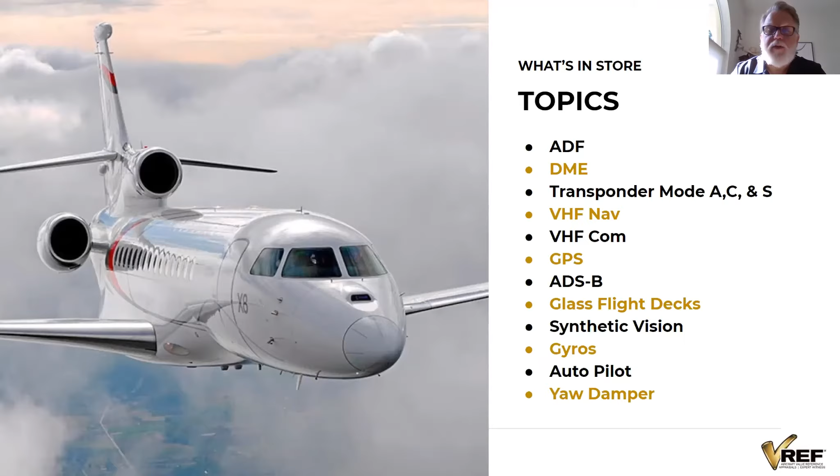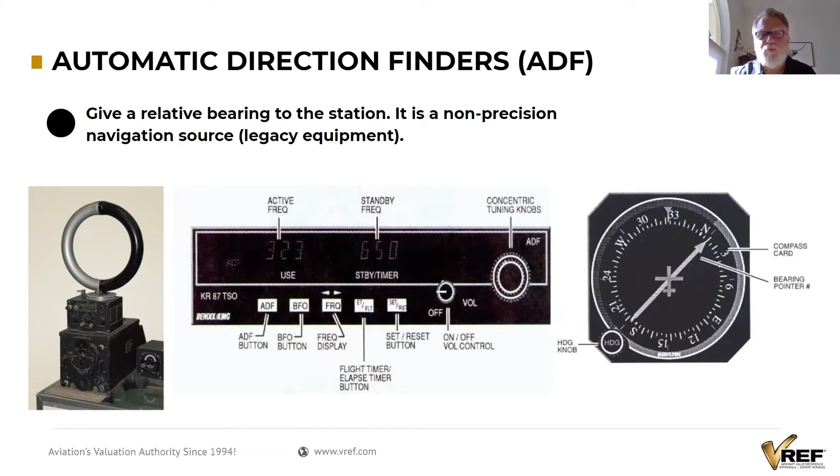Let's start with the old non-precision systems. ADF is one of the first forms of radio navigation. It's non-precision; basically a receiver uses antenna technology to determine where a transmitter is. Of course, some of the very first forms of radio navigation were four-course or A-N navigation, for some of you old guys like me.

DME, distance measuring equipment. These DME ground stations are co-located with either a VOR or a localizer so we can determine distance to a ground station or the runway. It calculates distance in nautical miles, and from changes in that distance it can determine ground speed or time to the station.

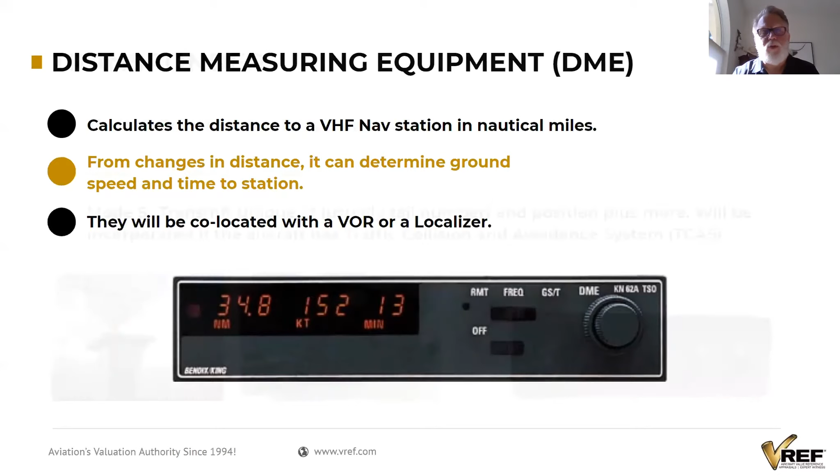Transponders, a big topic. This continues on with our pulse system, because DME is a pulse system form of navigation, and communication and transponders are as well. They use pulses to interrogate and to reply.

So we have Mode A, which is our identity, a squawk code that the flight crew dials into the front of the transponder. Then we have Mode C, which transmits pressure altitude, based off a standard day, 29.92 inches of mercury or 1013 millibars.

Then we have Mode S, selective interrogation, that's what the S stands for. It transmits a unique ID, usually the tail number, but it can be the flight ID, and it exchanges information like position, heading, and altitude. If you have TCAS, you're going to need a Mode S transponder, which is integral in the interrogation of other airplanes.

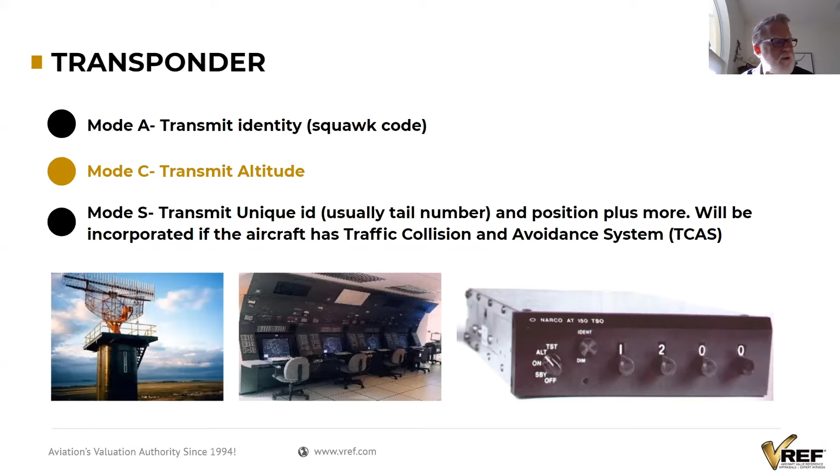VHF nav includes VOR, localizer, and glide slope. VOR, very high frequency omni range, is used to determine a bearing to or from a ground station. Then we have part of the ILS: localizer and glide slope.

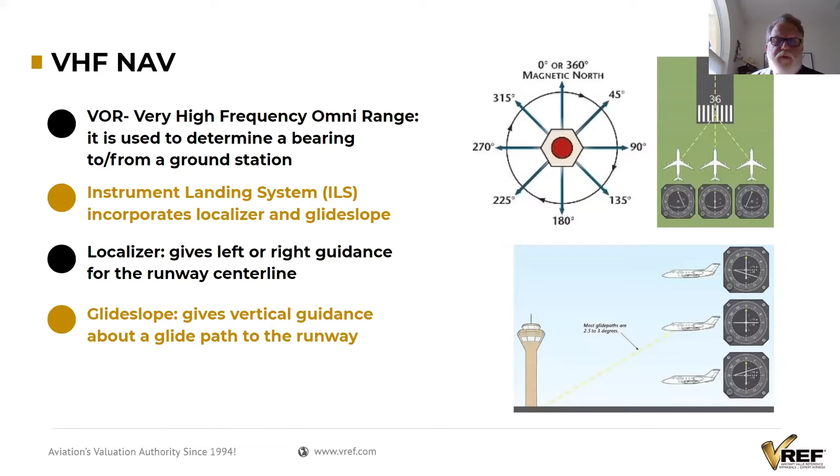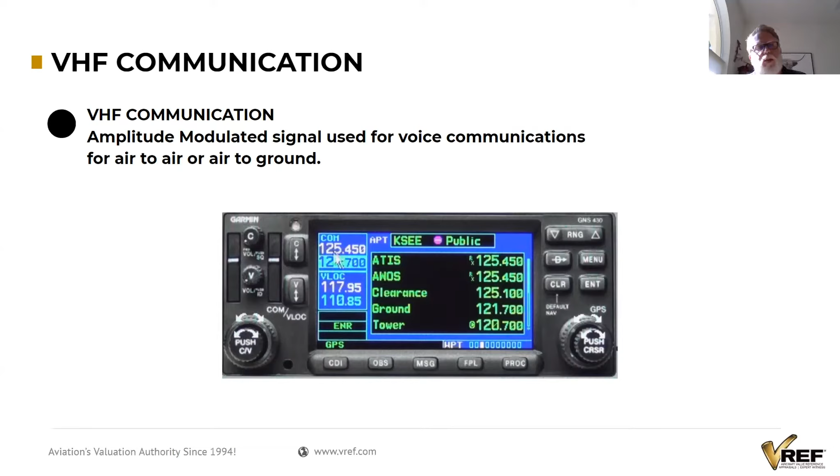Localizer gives us left or right guidance for the runway centerline, and the glide slope, a paired frequency of the localizer, gives us vertical guidance along a glide path, usually 2.5 to 3 degrees to the runway threshold. VHF comm is just what it is, voice communications. We use amplitude modulation in aviation - unlike frequency modulation you might be familiar with elsewhere - for air to air and air to ground.

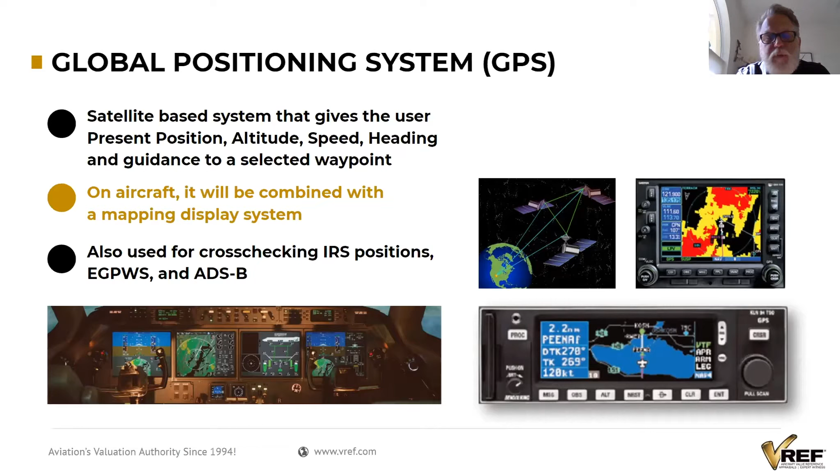Global positioning system, from a user standpoint, is the easiest form of navigation. It really tells us where we're at, giving us a present position that can be updated on a mapping system so we can see where we're at. We can also input a waypoint, and GPS will give us guidance to that waypoint, with altitude and direction.

So does GPS, Neil, replace your ADF and DME and Mode A, or is this redundancy? You always need redundancy, and that's one of the reasons ADF is still around, although it's non-precision - it's also why we still have VOR, why we still have localizer, why we still have glide slope.

So Loran went away a few years back, and that was a backup to some of these, but now GPS is, well, the VOR localizer can be a backup to GPS, or it can be the other way as well. 121 carriers can't and don't use GPS as a primary source of navigation, but in general aviation, you're seeing GPS used as a primary source of navigation, and VOR, localizer, glide slope, kind of secondary to that.

So when you see people buying brand new aircraft and they find that they have to order some of this old technology, it is still available, and that will never change. It's not about job security, it's actually about redundancy. You have two different systems, and it's about having two different systems.

So if GPS fails, and GPS is actually kind of a delicate system, there's been cases of outages with GPS and the accuracy of GPS. So you do want some form of backup, and you get into the bigger 121 aircraft, they'll actually be using inertial reference systems as their primary, which GPS can cross-check, but they'll use inertial reference systems for the primary.

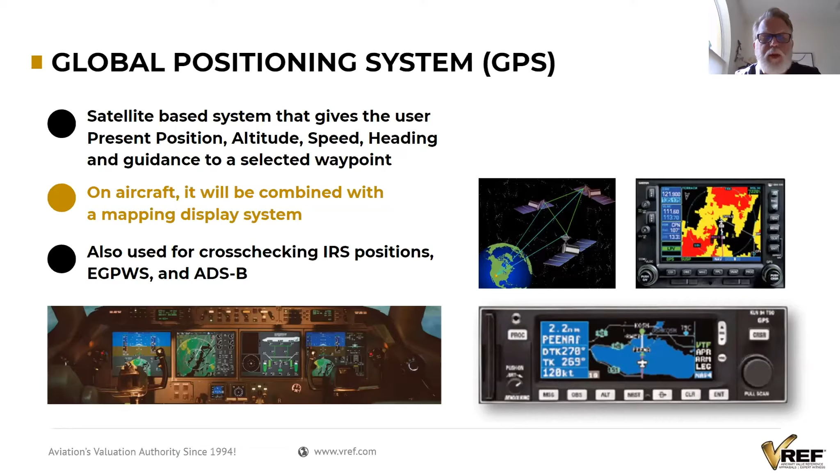And of course, with ADSB, automatic dependent surveillance broadcast, you have to have GPS. That's the position determining equipment that ADSB rebroadcasts out to all the other airplanes and the ground stations.

TCAS is a traffic collision avoidance system. TCAS uses Mode S transponders to interrogate aircraft, so it actually acts like a flying ground station. It interrogates other aircraft and looks for their relative altitude. Remember the pressure altitude I mentioned earlier. All the airplanes are going to output their pressure altitude. It doesn't really matter if that's their actual altitude. What's important is their relative altitude to your aircraft or other aircraft.

TCAS 1 will give traffic advisories, you know, there's traffic. Or if you have a TCAS 2 system, you can get resolution advisories, which gives us a vertical resolution or vertical profile to fly based off of feet per minute to avoid the closest point of approach.

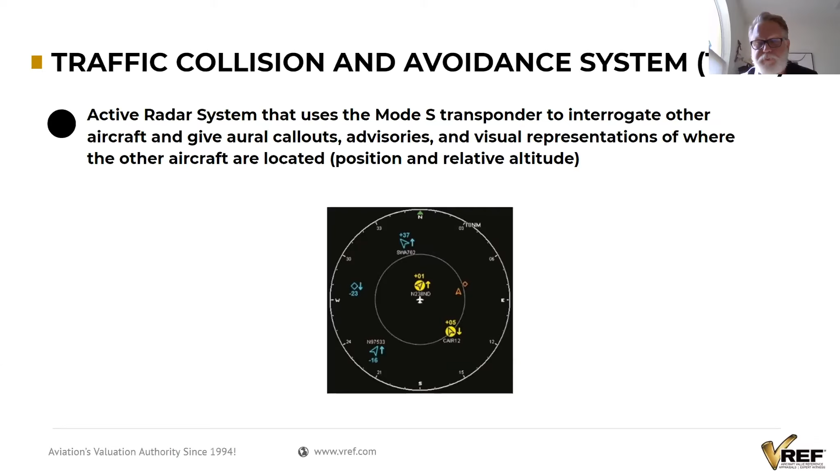The big one, ADSB, this was the big one this year, 2020 mandate. ADSB transmits position, velocity, altitude, and identity to other aircraft around it and to ground stations to be rebroadcast from the air traffic control system. So ADS-B out was the mandate, ADS-B in.

So ADS-B in, in this country, in the United States, you can get ADS-B in through 1090 extended squitter. This is the Mode S transponder. You can also get it from a universal access transceiver, a UAT.

That operates on 978 megahertz, so either one of those you can get in. However, if you have the UAT with the 978, you can get free weather. If you are using the transponder, both give you traffic, but you do not get free FISB weather information from the ground station. But if you have the UAT, you do. So that's a nice little feature of adding ADS-B in.

It's one of the reasons why we had so many early adopters to ADS-B for 2020. And ADS-B out was a requirement January 1st of this year, correct? Absolutely, it's a requirement to fly in certain airspaces. There was Class G that you can fly without ADS-B, but there's not much of that. So yes, ADS-B out is a mandate from January.

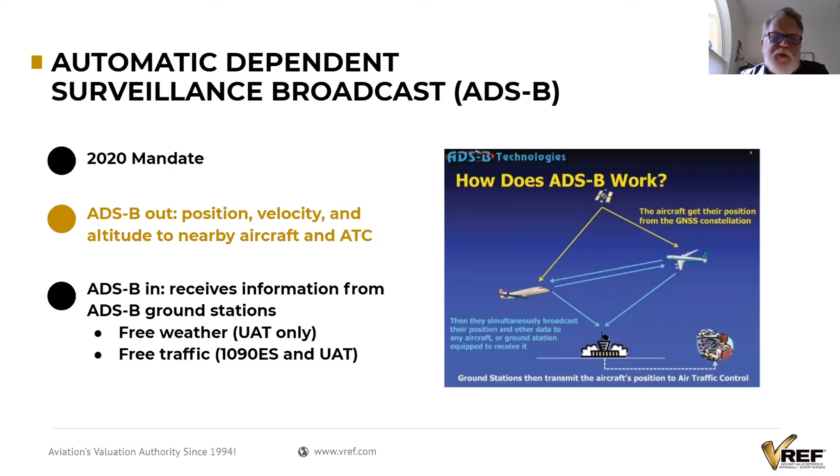Glass flight decks. Let's get into the glass flight decks. The first generation systems were dedicated systems. As you can see with this picture, there's no glass for the engine information. It's really EFIS, electronic flight instrument systems. This one actually has an MFD, but first generation systems are easy to identify because the displays are one on top of the other.

The EADI, E stands for electronic, and the EHSI, horizontal situation indicator and attitude direction indicator. On this one we have a multifunction display to handle some things, because there's not a lot of real estate on these early version displays. So this MFD would handle weather radar, some nav data, and some checklists.

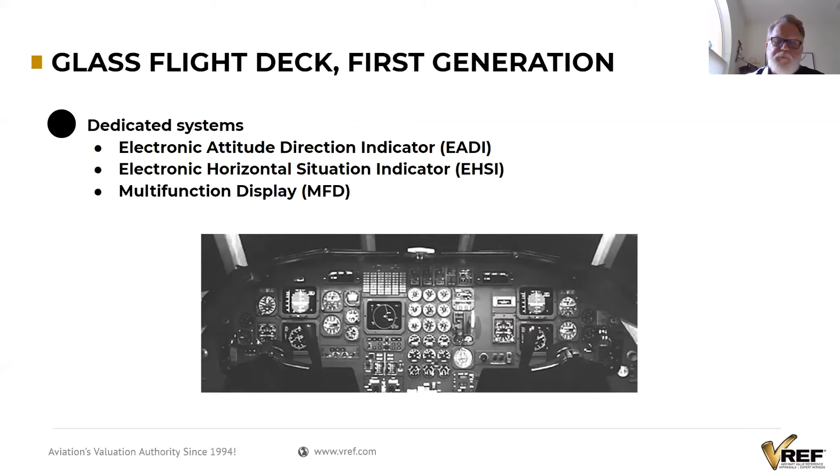First generation dedicated. Second generations are integrated systems. Now everything is starting to talk to everybody else. You can move the information around on these displays as you need to for emergency. There are some systems where you can do it for convenience. They're integrated, meaning all of the components are sharing all of the information.

And now we have a primary flight display. Primary flight display, PFD, as you'll normally hear it, is a combination of your EADI and EHSI. And we have a nav display. The nav displays show our route, weather, traffic, and things like that.

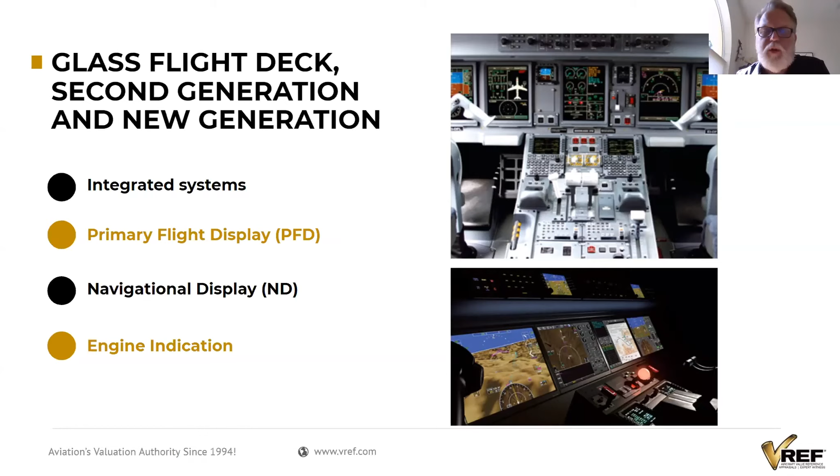With the second generations we added some engine indication, so we can get that primary engine indication up there, and also some crew alerting - annunciations to faults and failures on the airplanes, or even if something's starting to drift out of its normal operating range.

Second generations, newer generations I should say, may have a HUD, heads-up display. It is degree for degree conformal to the outside environment. It is frequency selective, meaning it only reflects one frequency that we interpret. If you see the slide on the right where you can see the green, that's the only frequency it will ever reflect - everything else passes through. Otherwise, if it reflected all of it, it'd just be a mirror.

So Neil, with HUD, is this a good example of technology that's come way down in price over time? Definitely. When these first came out, just the install part alone was very cost prohibitive to do. Although the display technology is not that complex, some of these are still using CRTs, or even at the newer versions, LCDs to reflect that image. So that part of the technology with the LCDs has driven the cost way down on these, and we're seeing them more and more.

And it's a great safety feature too, because now that we have heads up, we call the regular displays we're used to heads down. You'll lose about 3 seconds of focus going up and down, back and forth, where now you don't have to do that with the heads-up display.

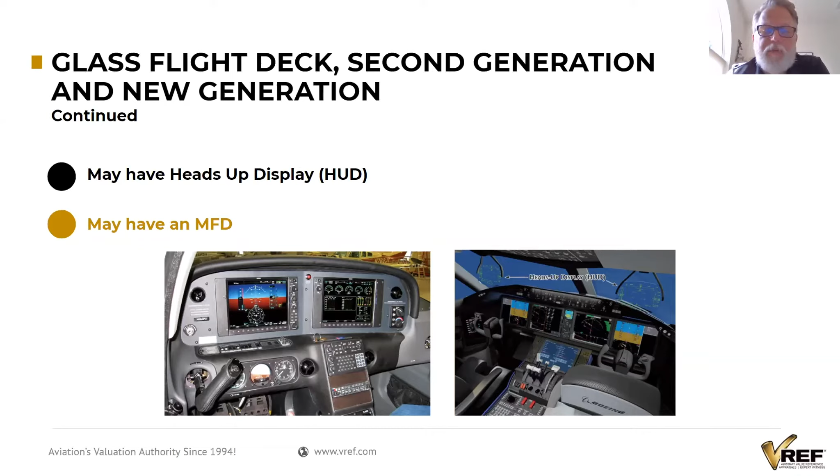Synthetic vision is also another nice safety feature. Synthetic vision is not using radar or anything to look out there - it's actually coming from a database. The database is based off of elevation plots and topology charts, and it is polygonally represented on the screen as to what is in the database out in front of you, to show you the terrain, obstacles and obstructions. If they came out and put something up overnight, it's not going to show up on the screen, so refreshing that database is very important.

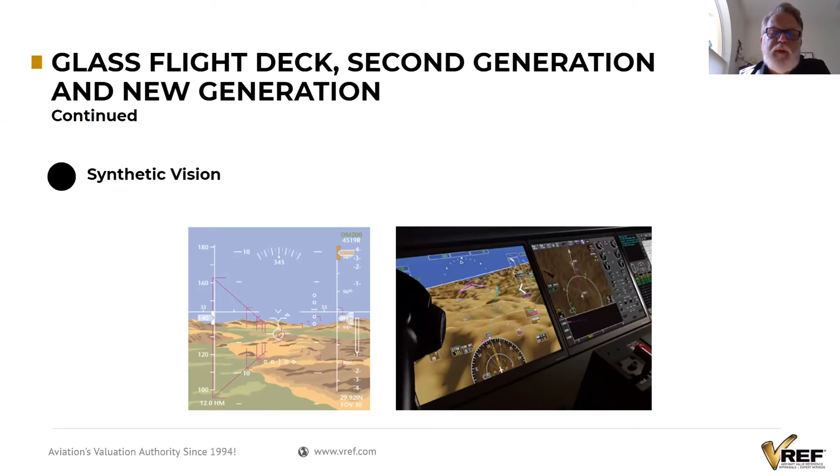Gyros. So where we get our attitude information from, or in the case of inertial reference systems, we get a lot of information from gyros. On the lower cost end, we have the rotating mass gyros. Their principles are rigidity in space. On the upper end, we have the inertial reference systems that use laser ring gyros and accelerometers. And right in the middle, we have attitude heading reference systems.

So let me back up a little bit to rotating mass gyros. If we have rotating mass gyros, we get our attitude information from that. We're going to need a compass system, which will have flux valves, flux gates, flux detectors, magnetometers, something to sense the Earth's magnetic field and give us a magnetic north direction. So they'll have that compass system as well as the rotating mass gyros.

The inertial reference systems don't rely on any outside influence from the airplane. So inertial reference systems don't have a compass system. They don't sense the Earth's magnetic field to determine magnetic north. They actually do this during their initialization, which is basically their warm-up. They can determine true north. They know where they're at based off of the latitude and longitude that we put into these systems, and from that, they can determine the true north heading of the airplane. Since they know where we're at, they know the deviation from true north to magnetic north. So it's all calculated. It doesn't rely on the Earth's magnetic field to determine a magnetic heading. That's kind of a neat little feature of inertial reference systems - all self-contained.

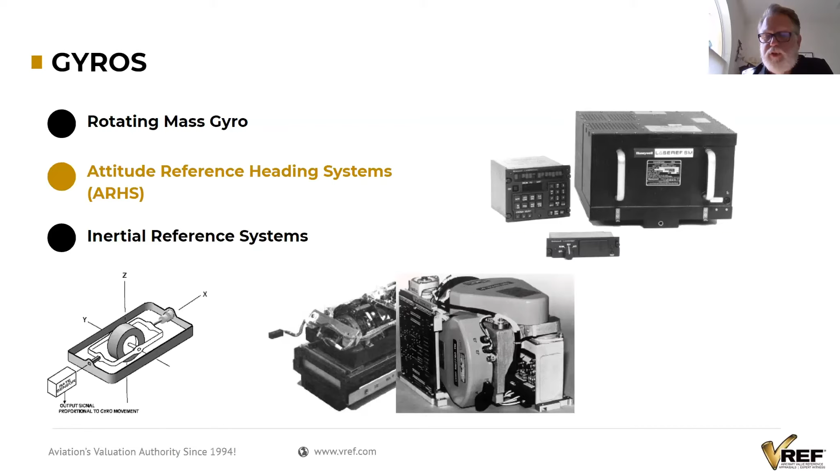Then we go to attitude heading reference systems, right in the middle of these two, cost-wise anyway. The attitude heading reference systems will have a traditional compass system, just like the rotating mass gyros had, and then they'll use some other sensor - each manufacturer is a little bit different as to which type of gyroscopic or angular rate sensor they use. For example, one of the more common ones uses a MEMS sensor - micro-electro-mechanical system sensor. It's kind of the same sensor that you have in your telephones that determines the orientation of your telephone. So when you rotate your telephone, they use those same sensors for gyroscopic or angular rate sensing to determine changes in the aircraft's attitude.

Autopilot. Autopilot is really a collection of systems already in the airplane. So we have some type of gyro system, something that gives us our attitude. We're going to have air data information, so something that gives us our airspeed, altitude, vertical speed, temperature. We're going to have VHF nav, so we need inputs for VHF nav, localizer and glide slope, things like that. Those are the normal systems we have on the airplane.

We put those together and have a flight control computer. So the two major components really in autopilot would be the computers - a flight control computer and a flight management computer. Flight control computer handles your normal modes of autopilot, so attitude hold, altitude hold, things like that. And then your flight management computer is going to be flying routes. Based off of a database, we input where we want - origin to destination, via waypoints - and it manages the flight for us. The flight management computer actually tells the flight control computer what to do on bigger airplanes.

And then another example of just technology advancing quicker than most people can adapt. So you tend to see a lot of new autopilots continuously released to the market, correct?

Correct. Yeah. And then one of the nice things is you get pre-programmed routes that you can put in these things. So if you're doing routes over and over, it's easy. Just plug it in, it populates everything for you, and you take off and actuate the autopilot, and it manages everything for you.

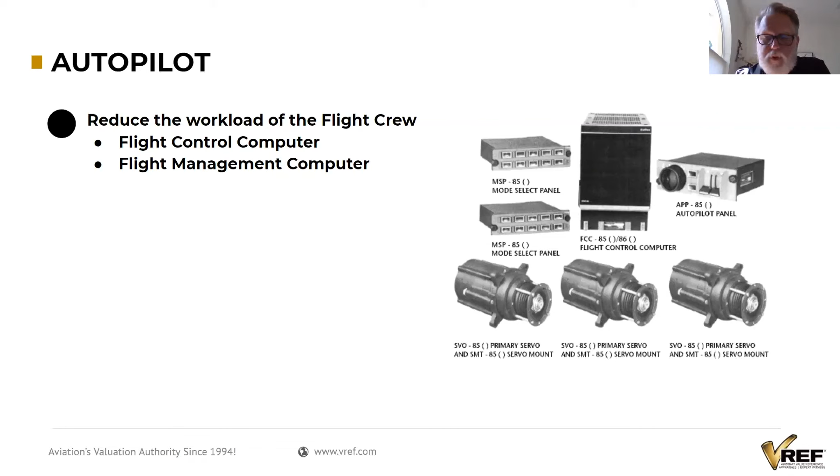Yaw damper system. This is a system that may be a little confusing. The yaw damper system really handles two different undesirable flight characteristics. One of them is Dutch roll. So an airplane with swept back wings, in high speed flight, creates an instability in the airplane, and it makes the back of the plane kind of sweep back and forth.

And when it does that, it eventually can get out of control and just roll right over. But in the process, everybody's sick in the airplane - it's very uncomfortable. So what it'll do is not only react to that instability, but also anticipate which way it's going to go next. So it creates a very, very stable flight. You don't feel it - it does a better job than the flight crew. The flight crew sitting up front, if they had to manage this undesirable characteristic, would be reacting to it. By the time they feel it, everybody in the back of the airplane would be ill, very ill.

So the yaw damp system may come from the autopilot system, but it's always thought of as a separate system. It has its own switches, so you can turn it on or off at will, independent of the autopilot.

On larger airplanes that have larger fuselages, big vertical stabilizers, that fuselage twists in flight, and when it twists, it causes that vertical to move back and forth. And when the vertical moves, it'll make the airplane turn, and that's called structural modal oscillation.

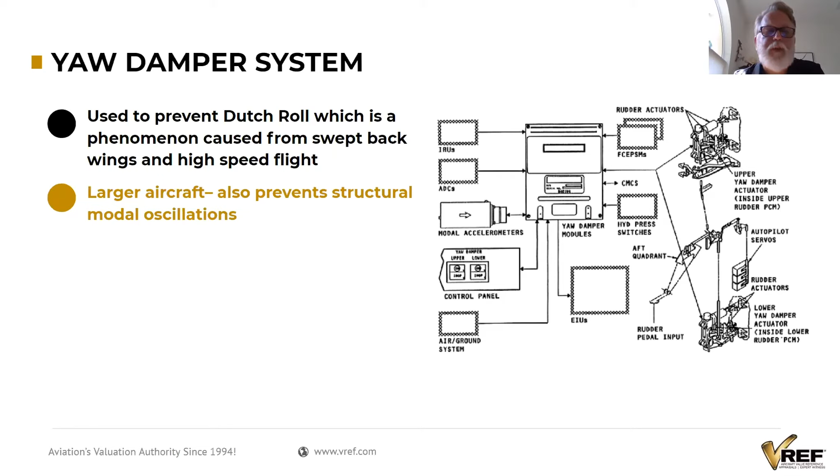So on these larger airplanes, you can have the structural modal oscillations. They're so critical to sense that they'll even put modal accelerometers in the tail of the airplane to sense that, instead of just trying to pick it up from the inertial reference systems. So yaw damp takes care of that roll and structural modal oscillations for us.

Connectivity, this is the big one for today, and this really kind of leads us into the future of avionics right now. So connectivity, voice data, and cabin communications, right? And we really have two systems for that, air to ground, or right now 2 common systems for it.

Air to ground is good for the continental US above 10,000 feet. So above 10,000 feet, you can get seamless connectivity from air to ground, 4G speeds. So pretty good, cheaper solution as far as data anyway.

And then we have satellite-based systems. So we have LEO systems. LEOs are going to be your narrowband. This stands for low Earth orbit satellites, and that's going to be where your Iridium system types are going to fall. Voice, some data, not broadband solutions. So not right now anyway. There's a couple of systems out there that are coming up with that.

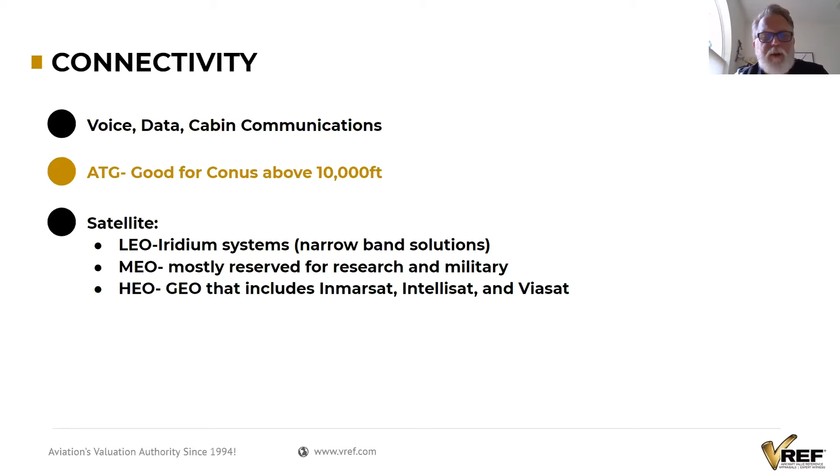So we have the medium Earth orbit. Those are mostly reserved for research and military. And then we have the most common, besides the Iridium, which are the high Earth orbit, or you tend to hear GEOs. And that means geostationary, stays in the same relative spot in the sky to where we're at on all times. And that's going to be your broadband solutions. Inmarsat and Intellisat and Viasat are the big players there.

I know that a lot of business jets now, a lot of international long-range aircraft are having ATG and some sort of geosatellite system installed. But at what point in the future do these systems actually merge and allow for kind of a one-size-fits-all type of solution for connectivity? And is some of that 5G related versus existing infrastructure?

Right, so that would be nice. And the simple answer to that is they're different manufacturers. So they're going to hold on to their technology. They have some of those, Inmarsat, they have their own satellite systems up there. So they want those used to have air to ground and satellite all in one.

It's going to be based off of a company. Is a company going to have an air to ground solution and a broadband geo solution all in one? Then that's when you can get it.

So this is important. I think this is an important subject for people, because I don't even think a lot of people in our industry know this, but you're really talking about branding more than you're talking about solutions, right? Because most of these satellite companies have invested a ton of money into putting their satellites up into orbit. And that's really what you're talking about, is which infrastructure are you going to align yourself with. It's not really which one is different, right? It's a Pepsi versus Coke. Is that a better way of putting it?

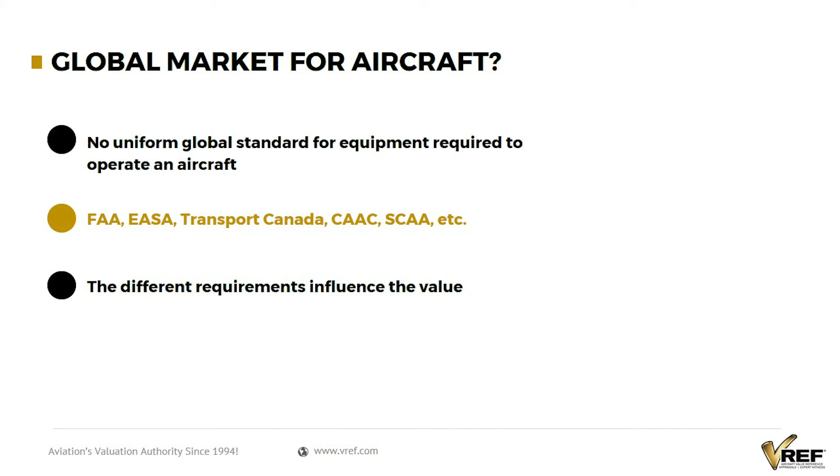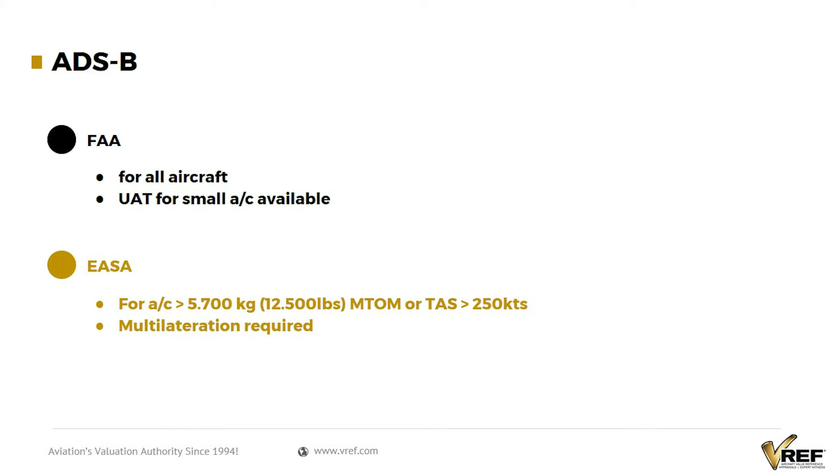Talking about ELTs, EASA requires a 406 megahertz ELT for all aircraft below 20,000 kilograms max takeoff mass. Why? The airlines didn't want to invest because larger aircraft usually have other means of communication, and except for some bad examples like the Malaysian crash, you usually should know where a large airliner is in space. So small aircraft, or aircraft below 20,000 kilograms, need a 406 megahertz ELT.

In the United States, you can still operate the old 121.5 / 243 megahertz ELTs, although in the US you're no longer allowed to import or install these ELTs - you are still allowed to operate them. But an aircraft with a 121.5 ELT from the United States, which is sold to Europe, requires re-equipment, and this is costly. So a prospective buyer will deduct the cost of installation from the value.

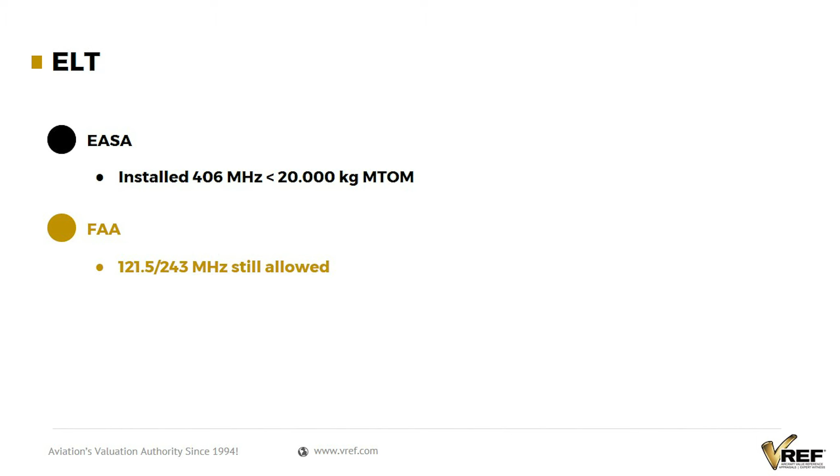8.33 kilohertz spacing on the COM radios. EASA requires all aircraft in all airspace to have this 8.33 spacing. The FAA doesn't mandate it, although this is no longer of real concern because the modern GPS Garmin installations all have the ability to switch between 25 and 8.33 spacing.

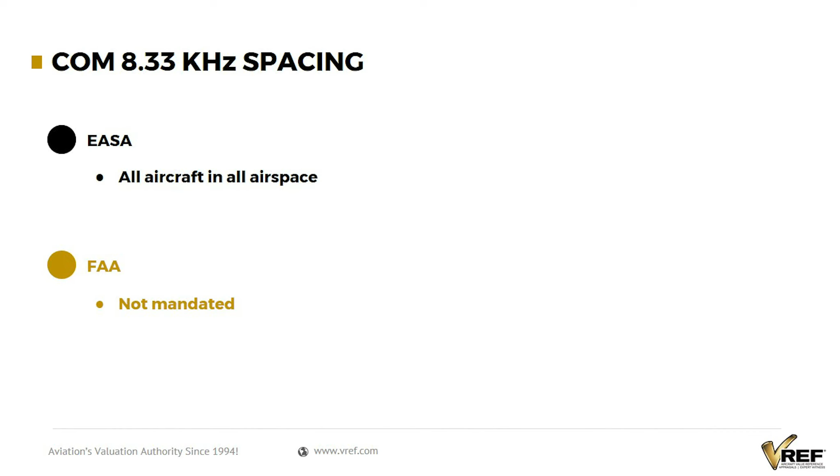Area nav, a very important point. Most airspace in Central Europe no longer has airways. You have point-to-point navigation for hundreds of nautical miles. So without a certified area nav aircraft, you cannot fly IFR in Europe any longer. They decommissioned the VORs, the DMEs. In the FAA world, the airway system is still available. So an aircraft that's pretty much able to fly IFR in the United States will not be able to operate IFR in Europe.

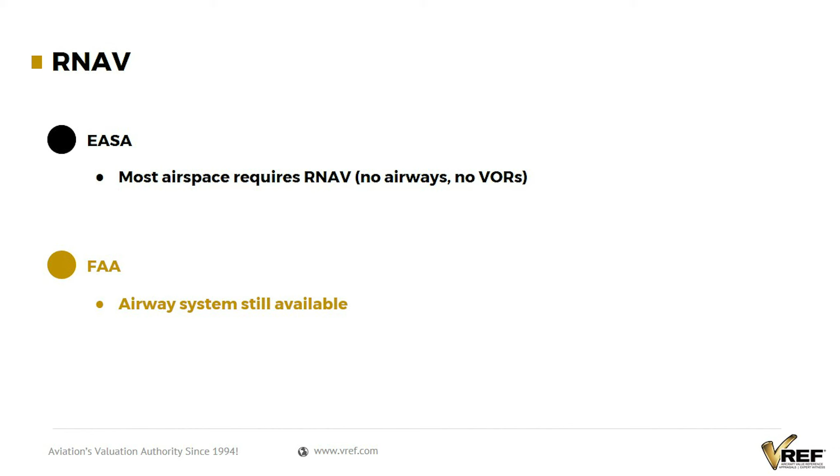This is an influence on the value. Someone who buys it has to reinstall expensive equipment. Even more complicated for large aircraft, cockpit voice recorders, flight data recorders. The FARs are basically based on the number of passengers an aircraft can carry, and then you have the requirements.

In Europe, we have this infamous regulation 965 from 2012, which is 1,100 pages, covering not only FDRs but other equipment, with a very complicated system - a combination of the kind of operation: commercial, non-commercial complex, non-commercial non-complex, weight, passengers, required flight crew, date of type certificate. Depending on this combination, you have different requirements for flight data recorders and cockpit voice recorders, and there's also the question of how many channels are recorded.

EASA is increasing this, although ICAO is following suit. But there is still a lot of differences.

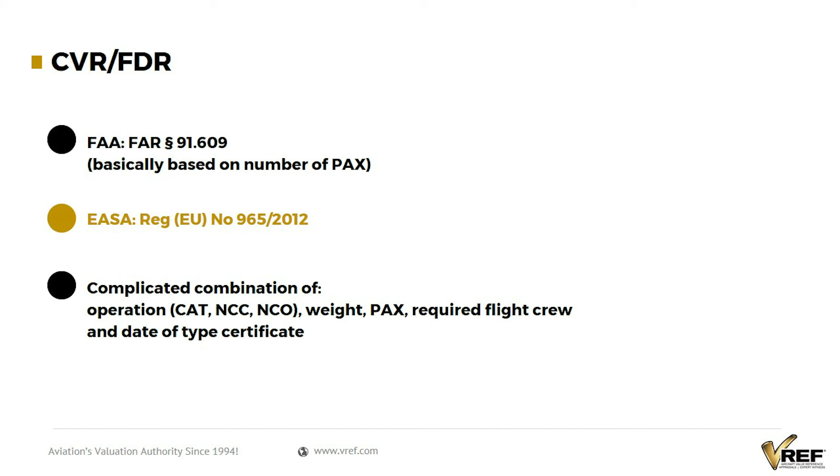So if you want to bring that aircraft to the United States, you either have to find a DER who is prepared to issue an airworthiness certificate - but from my experience, this usually is not the case - or you have to retro-engineer the whole installation and get it certified by the FAA. The same is true from the FAA side with STCs that are not validated by EASA, which is even more complicated and more costly. So all these expensive installations can be of no value in a specific market, either because it's not required there or it is not certified.

That's why it is very, very important to get good advice and to know where the aircraft will trade and what requirements have to be met in order to get the aircraft certified. If you have any questions on this, in particular regarding Europe, just give me a call or send me an email, and if I'm not the right person to answer it, I have a lot of really knowledgeable people at hand who could check for you if this aircraft could be re-registered in a different jurisdiction at reasonable cost or not. So for us as appraisers, it is sometimes really, really hard to assess the value of an aircraft that has to go from one jurisdiction to another.